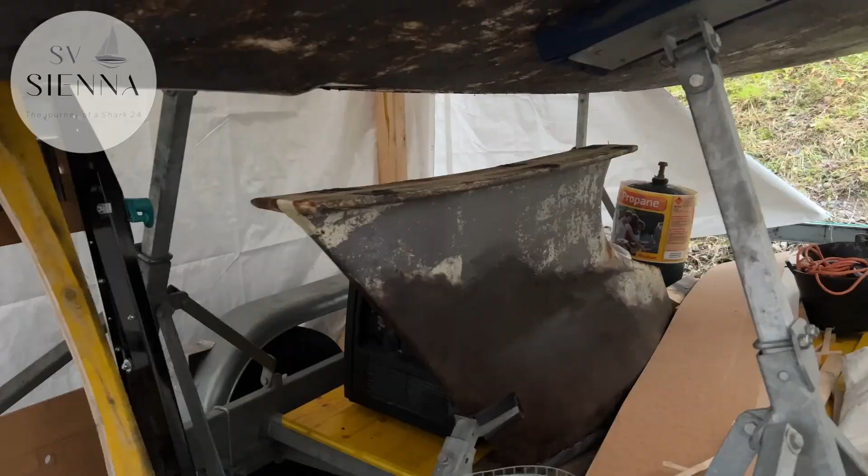Let's take a look. There's a gap here, which needs to be filled. It's approximately 15 centimeters. So, what we're doing in this episode is templating everything. Take measurements and put them into a software called Fusion 360 to design the keel-to-hull transition.

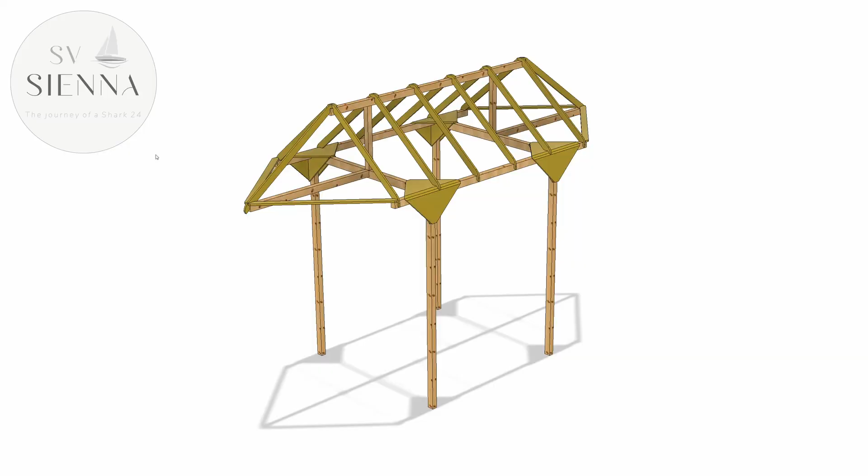If you're new to the channel, let me get you up to speed. Sienna is a Shark 24 I bought for 10 Swiss franc in an online auction. We got her to the yard, I designed a tent for her and built it. Then I stripped her to her bare hull. I started at the bottom adding ballast to the keel by first making a mold and then pouring lead.

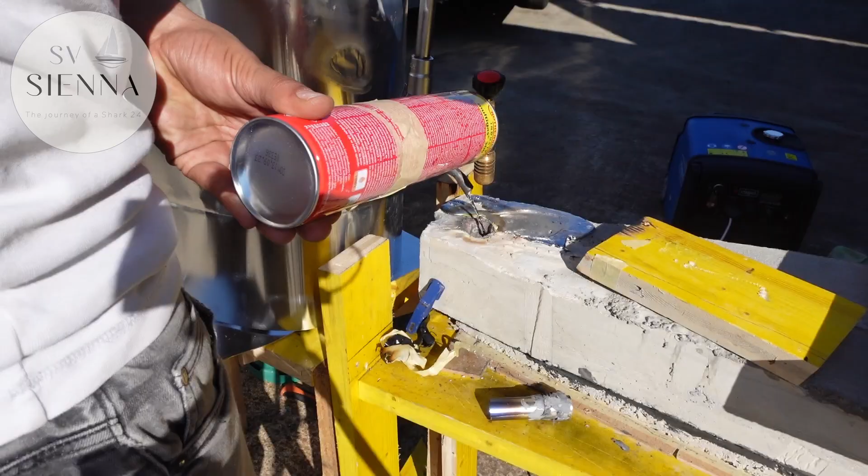The goal here is to get her ready and safe to cross any ocean, starting with the Atlantic in 2030. This radical keel project I started with is probably the most ambitious modification I'll do to the boat. The goal is to add stability without compromising the sailing characteristics of the boat too much. Safety is the main priority though.

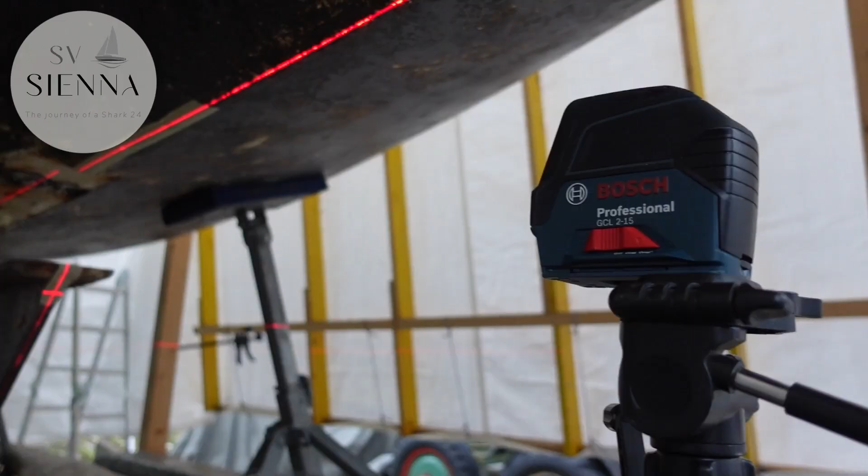So the first 2 hours I've been here, I've just been fiddling around to get the boat exactly in the same line as the keel and exactly in the same plane as the keel. So everything is exactly aligned, which is kind of important, in the water.

And we need to make a connection between the keel and the hull, which has to do a few things. One, it needs to be very strong because the keel is 450 kilograms. So there's a lot of forces playing on the hull. And secondly, it needs to have some kind of foil shape, so it will not create a lot of drag. This probably is the most complicated part of the templating, but if I can get this one done, well, probably the rest will be a breeze.

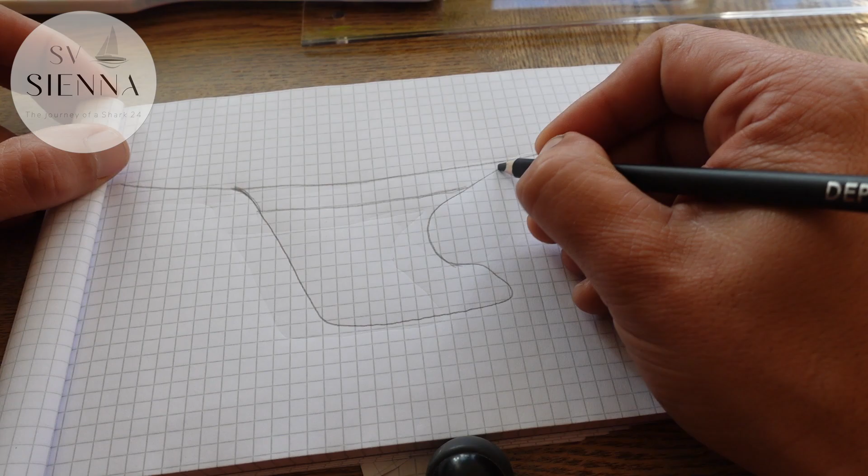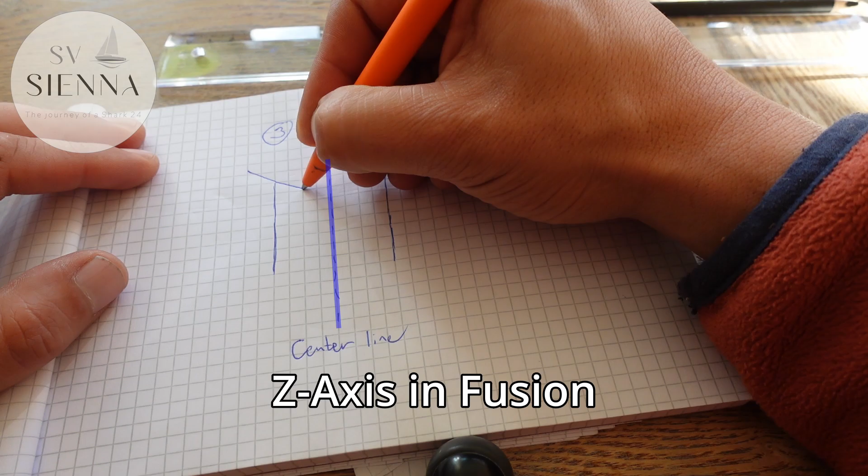To come up with some kind of plan, I started drawing, just to try and find out how I'd manage to get all this non-straightness into a CAD program. I need some kind of reference here. To get to usable measurements, it is crucial to start seeing the real world in CAD, where there are 3 reference lines for 3 dimensions. X and Y forming the horizontal plane, and the Z-axis standing for the height.

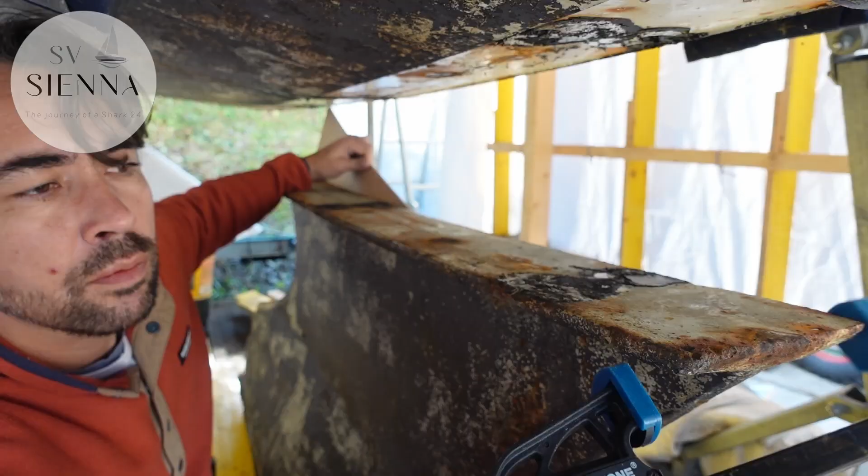Now, since there's nothing to go off from here, I need to create a reference line in the real world. The easiest option in this case is the horizontal longitudinal line, which corresponds to the Y-axis. Since it's easy to do, I'm copying the curve of the keel flange first. First step of many, I think. I'm just winging this. A first reference is there.

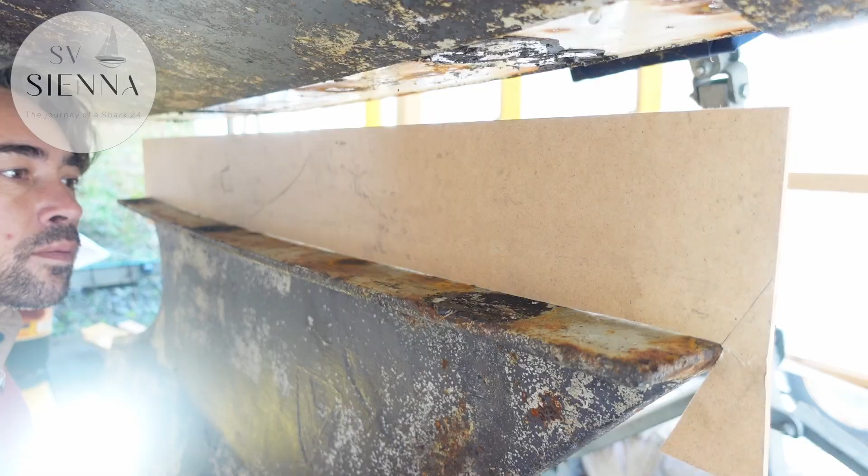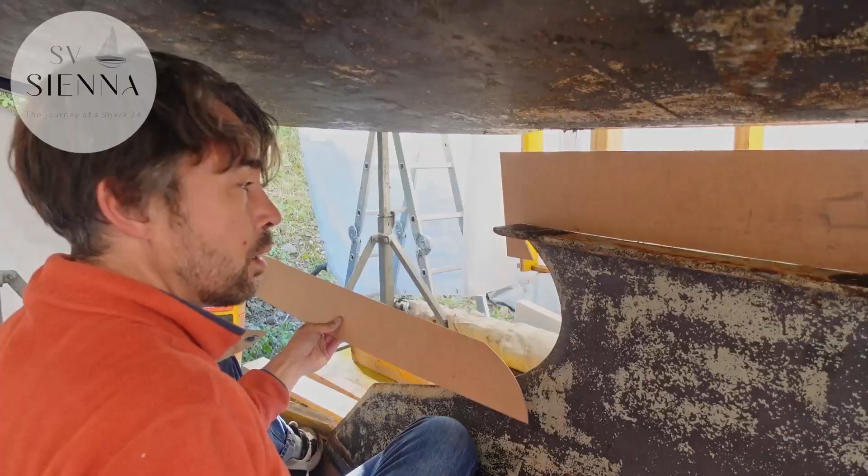Now I'll start to connect the template to the hull. Now there's no need to get the complete length of the boat, but I need to have enough of the keel area. My process of templating developed as I went. Marking off a piece, cutting it, gluing it on the template, and so on. It's essential to keep in mind how the template will be used later. Utmost precision isn't necessary here. I just need some base to work off.

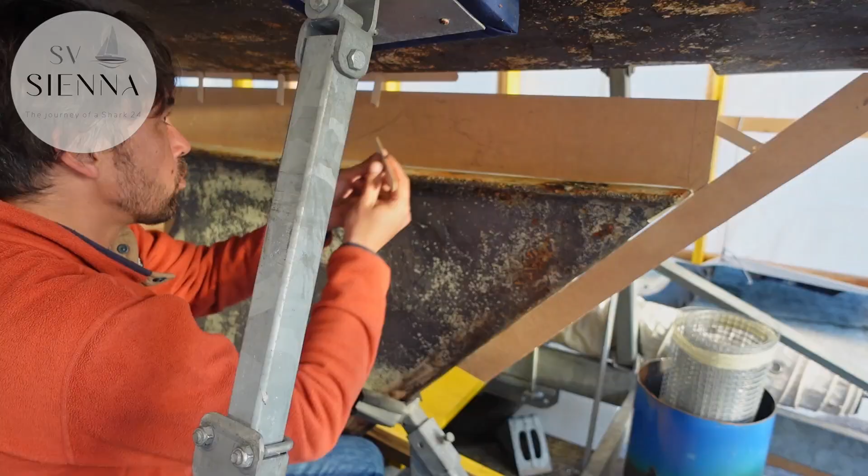Here I'm using small wooden sticks to follow the bottom center line of the boat. Just now I actually have a plan. A straight reference line will appear shortly.

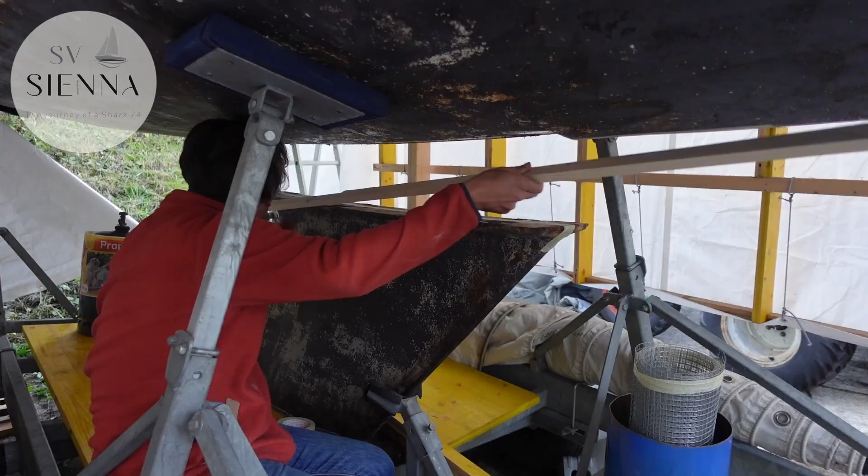There it is, the straight horizontal line which will represent the Y-axis in Fusion 360. Now I'm pre-drilling holes in another slat which is to be mounted underneath the first one. Small blocks are being placed at a measured and noted distance to template the hull shape, where this is the end result.

My better half and daughter were pleased to see me take the project home. I assured them it was only shortly. After I take the measurements, it will go again. Or it will find a use as a Christmas tree.

Anyway, more measurements were taken to get the outline of the keel, to end up with this list, which probably only I understand. Okay, I'll explain. Let's get into Fusion 360, that makes everything a lot easier. I start by creating construction planes along the green Y-axis. The distances are the first column in the list.

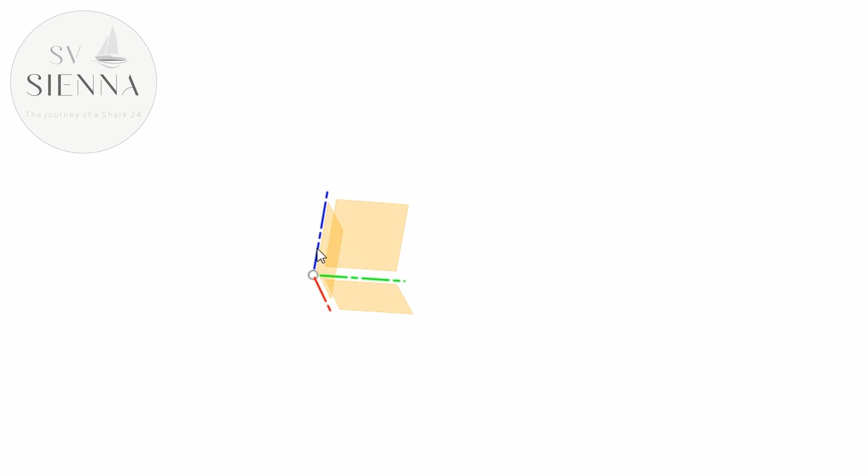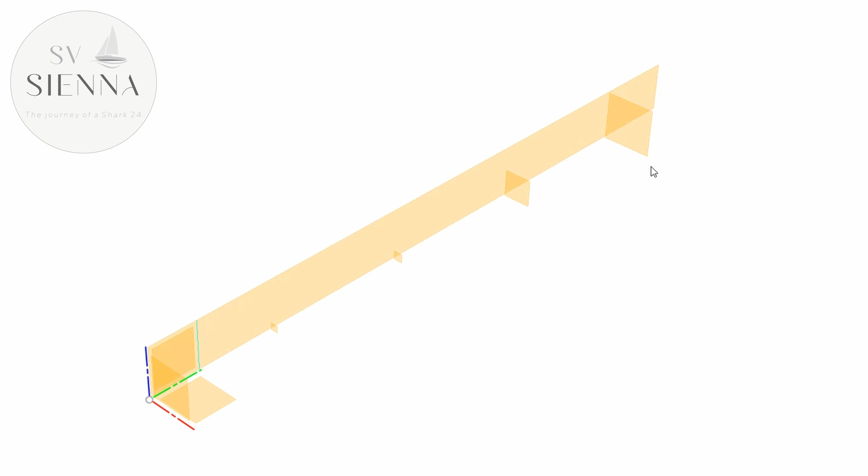The unit I measured was in centimeters and Fusion thinks in millimeters, so the first plane lands at 290 millimeters from the origin. The next one is placed at 615 millimeters and the next ones are added according to the list. Now I'm placing the central plane. To make things a bit easier to handle, I'm making the planes bigger. As far as I know, this doesn't do much when it comes to function in the program, but it helps me to visualize where I am.

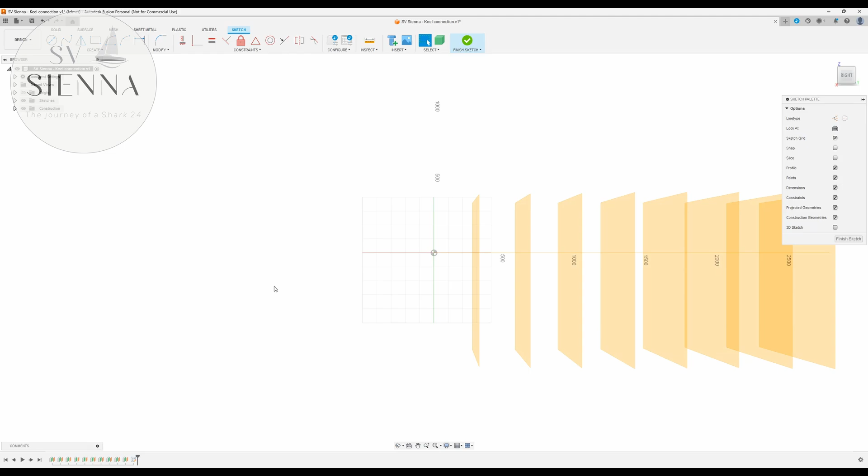Now, I won't bore you with a detailed 3-hour montage of how I'm working in Fusion. For that, there are loads of expert videos on YouTube. I'll just show you some of the steps I took. In Fusion, modeling is typically done starting with so-called sketches, which are mostly being placed on construction planes. I'm starting with the central sketch, which gives me the side view, with the outline of the original keel and the shape of the bottom of the boat.

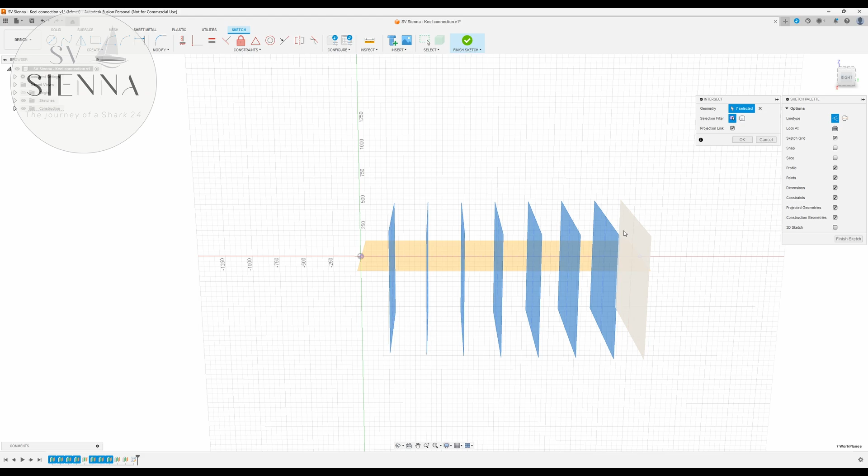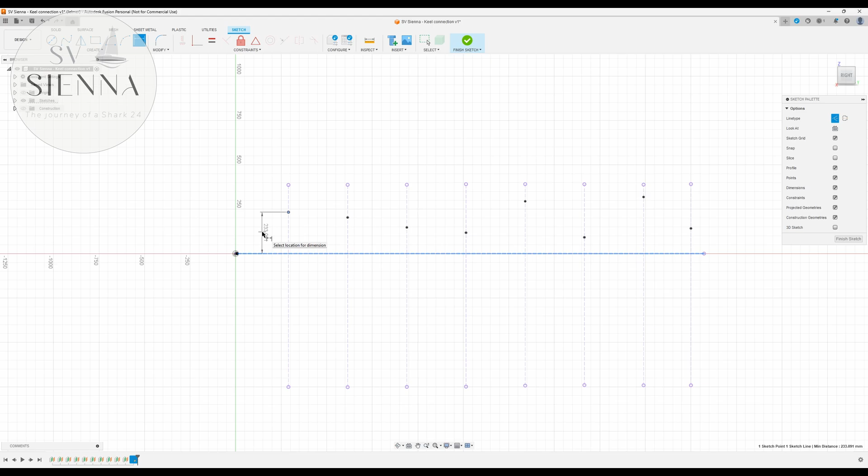Here I'm creating intersections, which draws dotted construction lines where the planes intersect with the sketch. These lines represent the horizontal reference and the positions on this reference where I took measurements. I'll start with the measurements of the bottom of the hull. I'm placing the dots randomly on the lines so I can give them the measured height afterwards. Note that I had to place some extra lines and dots to cover the recess in the hull where the keel was originally attached.

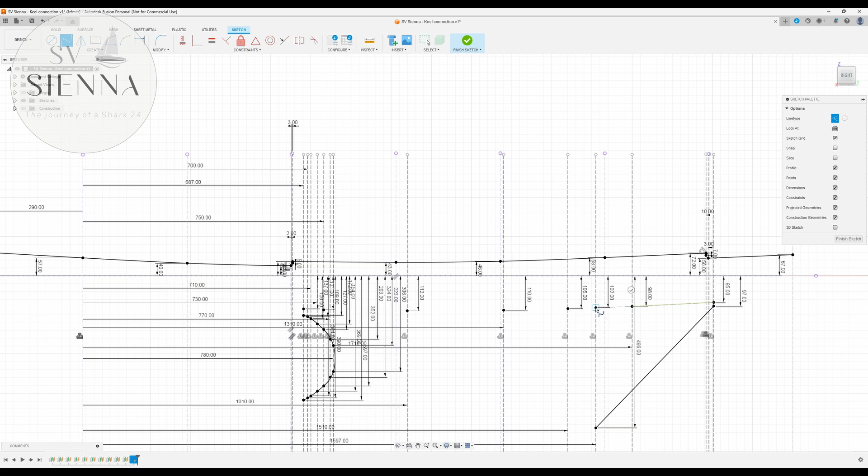Now that I've got all the points I measured placed in the sketch, it is as simple as connecting them with a so-called spline. The central bottom line of the hull is done. The same technique was applied for the outline of the keel. Close sketch and give it a sensible name.

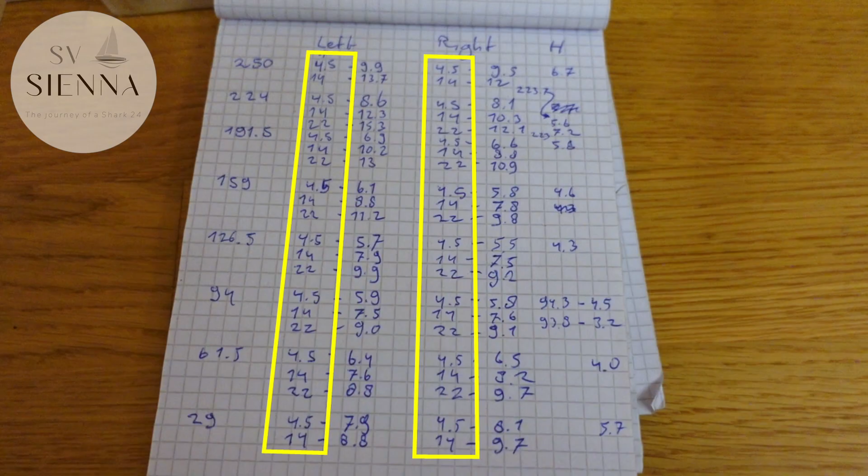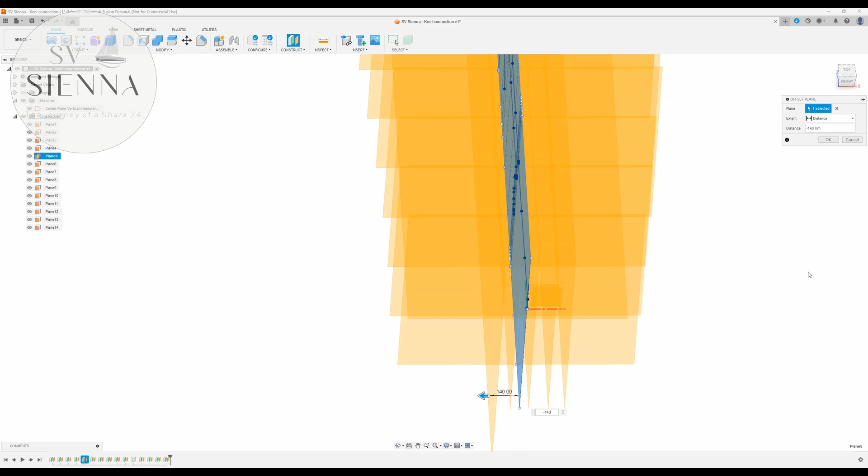Next, I'm creating the longitudinal planes which correspond to these points of measurements on the list. Note that these planes are all offset from the central plane. So the ones on the right side are positive 45, 140 and 220 millimeters, and the ones on the left side are the same but negative. I've roughly resized the planes again so they stay accessible. To try and stay organized, I'm naming the construction planes so I can keep track of what is what.

After this, I want to create sketches on all the square planes to get the actual shape of the hull. But the dimensions I took and wrote down didn't take the thickness of the bottom slat into account. But Fusion allows you to enter equations as dimensions, so let's do that.

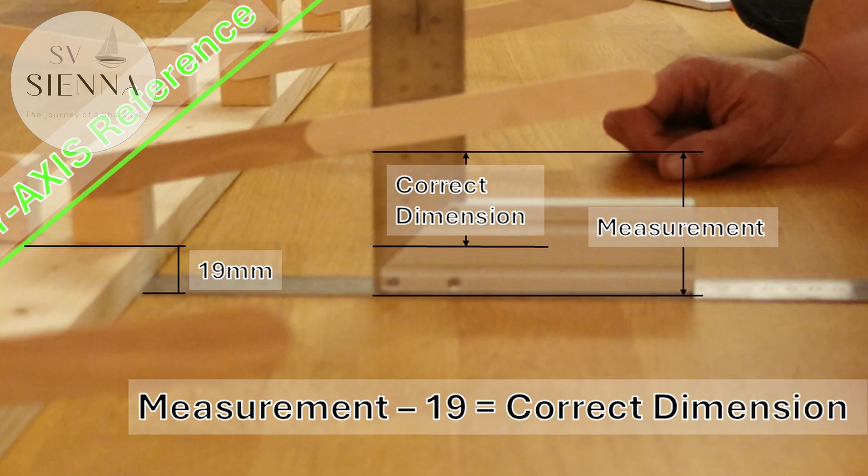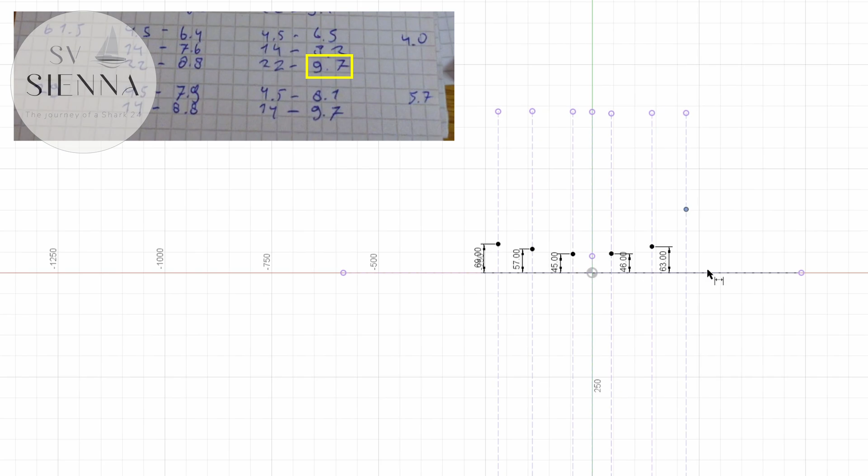The keen eyes amongst you might notice something strange. The points on the left and right are not really symmetric. Sure, the way of measuring hasn't been that accurate, but it's still clear the hull is not perfectly symmetric at all. For design purposes, I later evened this out to get a symmetrical hull shape. For me, it is not that important to have the exact shape, since the connection to the hull will have to be built manually anyway.

So here I'm connecting the dots using a spline again. When the sketch is finished, it gets its name to keep things nice and organized. The same process is done for the remaining square planes to complete the shape of the keel area of the hull.

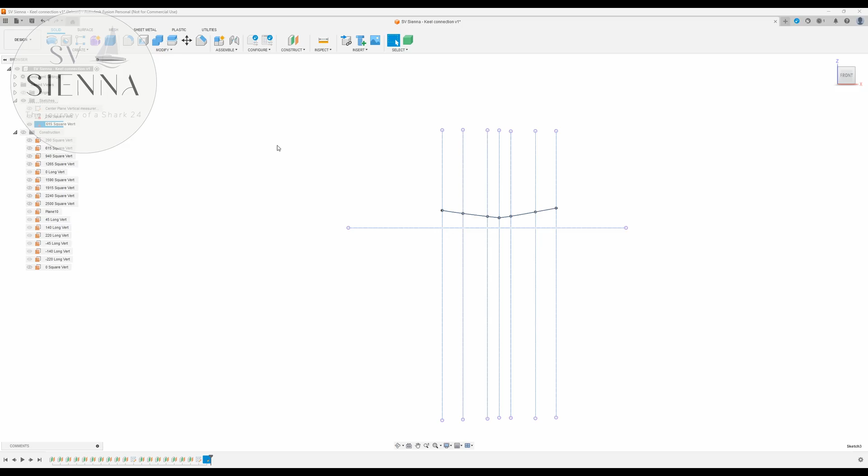Now from here on I didn't record the screen anymore, because this would give me hours of footage to work through. But another cool feature of Fusion is that there is a timeline, and you can go back to any step you've taken before. And I'll use this timeline to show you some of the highlights.

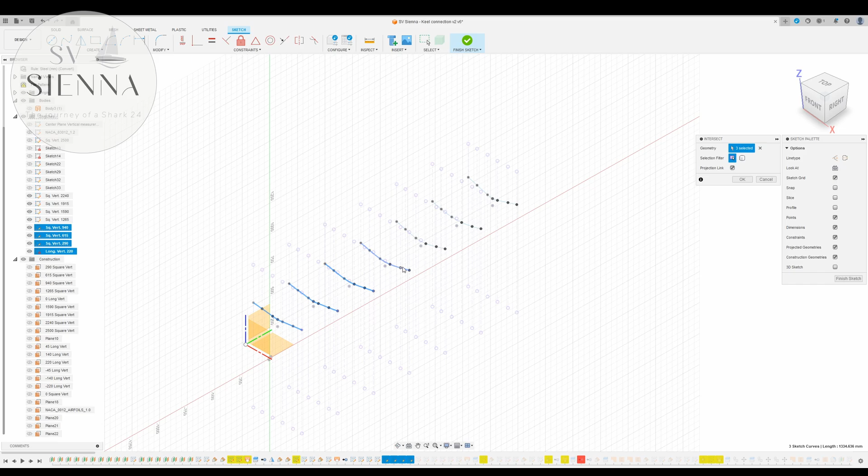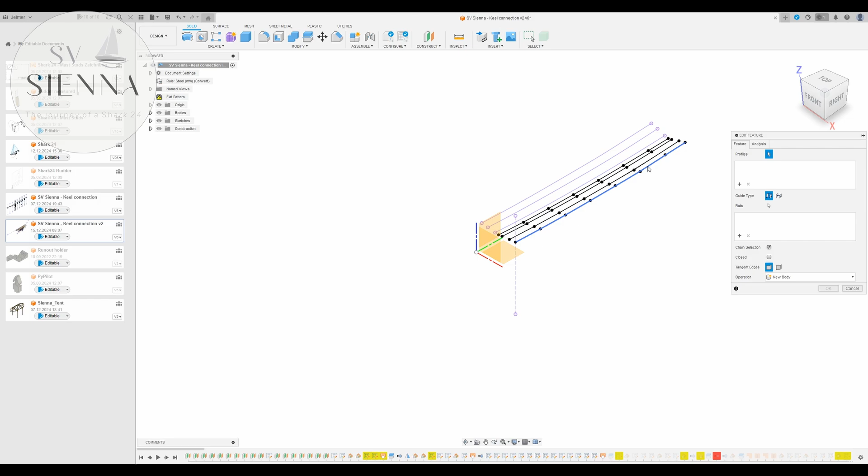Here I recreated the process for you, where I'm creating the hull lines on the longitudinal planes. I intersected the lines on the square planes and then connected the dots using a control point spline. This essentially smooths out the lines. Rinse and repeat for the other longitudinal planes to finally get to the first actual surface in the model. This is created using the loft function. A workable hull shape has emerged. To me, this is a rewarding part to see take shape.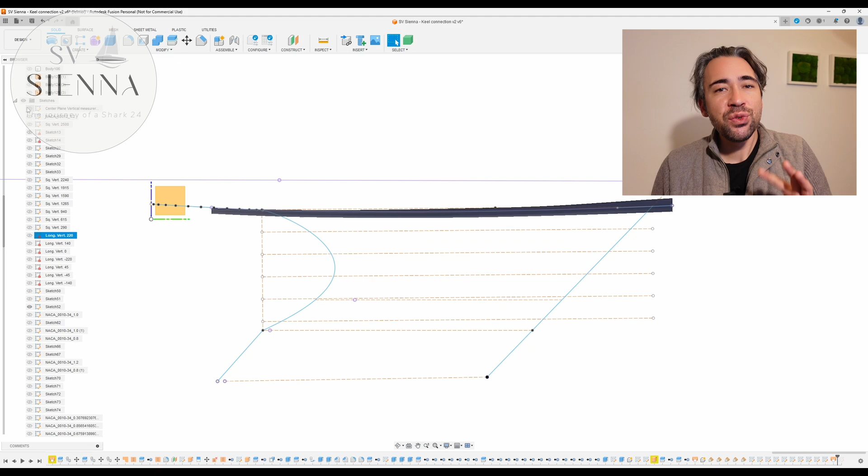The next sketch will show the new outline of the keel. And I'll blend in the original keel as well. And it is visible that I will be extending the keel, and I will do this for two reasons. The first reason being that I will have more area where the keel connects to the hull for added strength. And the second reason is it will give the boat a bit more directional stability, which means it will be easier to keep it on the same course.

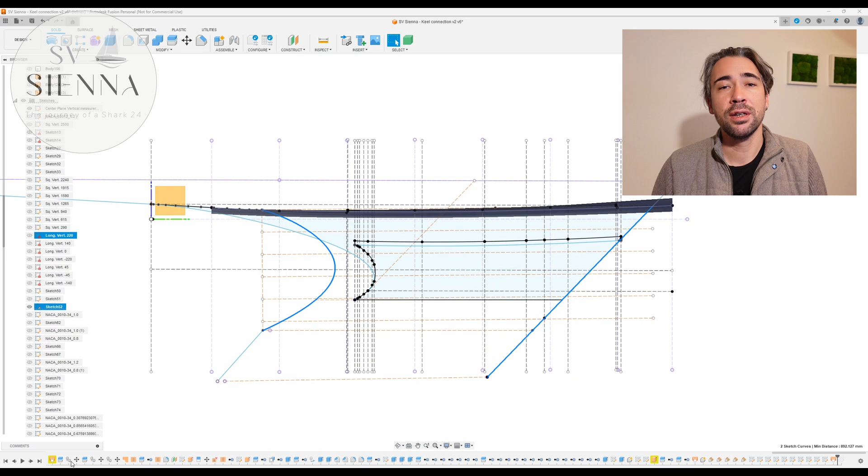Another sketch I made, which I'll show you here, is the vertical shape I want the new profile of the keel to follow. This profile will come shortly.

After I uploaded my last video, a very kind person of the German Shark 24 Association contacted me, asking me why I was adding ballast to the keel of my Sienna. After I told him about my plans and that I wanted to have some extra security and stability, I asked him if he could point me to typical weaknesses of a Shark 24 on the ocean. He was very helpful in giving me a lot of information on the strengths and weaknesses of a Shark as an ocean crossing vessel. He especially pointed out that the Shark has the ability to plane on the water, which gives it the ability to reach staggering speeds of up to 13.5 knots, which is why the Shark was getting so popular in its time and still is.

When it came to weaknesses, there were two main points where one influences the other a lot. The original keel has large flat areas on the left and right side, which create turbulence and swirling air bubbles, which create drag, but more important, they create a lot of stress on the rudder. To mitigate this, the keel should have a proper foil shape, which reduces drag, but more importantly, reduces the stress on the rudder.

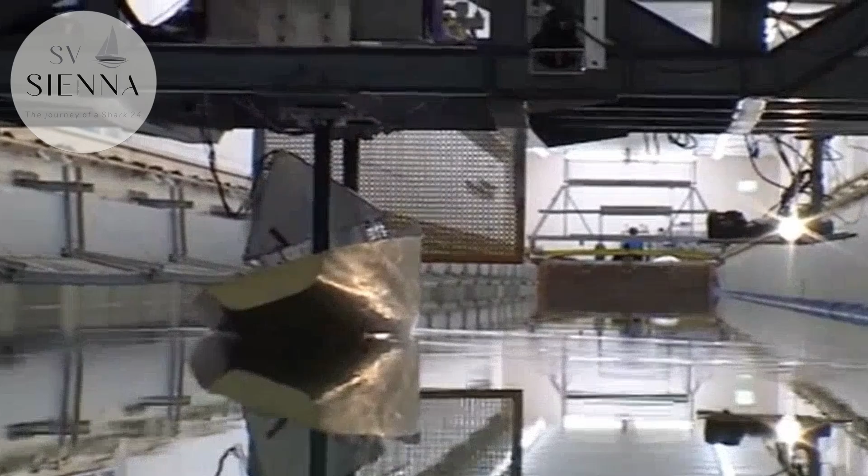Here I did a lot of research on the internet, and I landed on goodoldboat.com on an article by Ted Brewer. He tank tested several airfoil shapes on fin keels for similar boat sizes to Sienna, and found that the NACA 0010-34 would be a solid choice for this type of keel. So I got this airfoil as a base for the new keel profile. This is where I'm at right now.

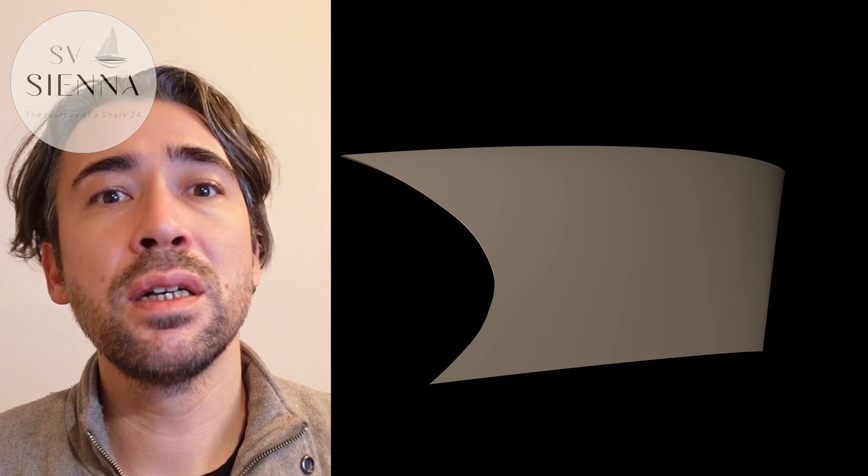The same person from the German Shark Association told me he wouldn't lower the keel, since apart from the missing foil shape, the original keel has served several ocean crossers well, which makes me consider lowering the keel only slightly to accommodate a solid transition, but trying to keep it as shallow as possible. The added ballast will already have a lot of impact.